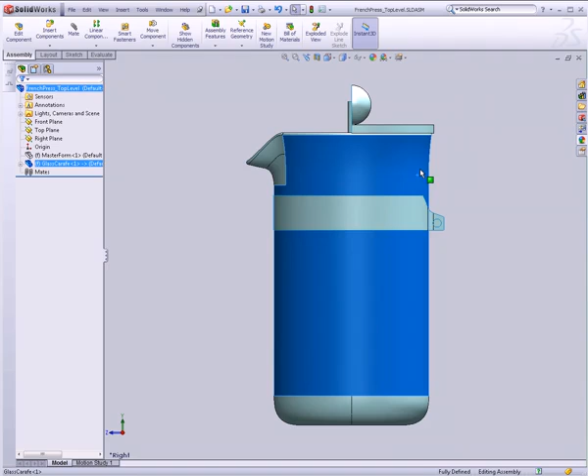Now at this point you might well be wondering why we didn't put the handle, which is such a big important detail, into the master model. Well, as it turns out, we didn't need to, because all we need for the handle is this surface here and maybe this screw hole there.

So why don't we go ahead and add the handle next. First of all, I've got a bunch of surfaces showing in my glass carafe now that I would like to hide. When we imported that master form, it brings in all of the surfaces, and since we added a whole bunch of new surfaces, they're showing up in our part. So to hide them, I'm going to expand my part within the context of my assembly, go down and just hide all of the surface bodies, because we don't have to look at them.

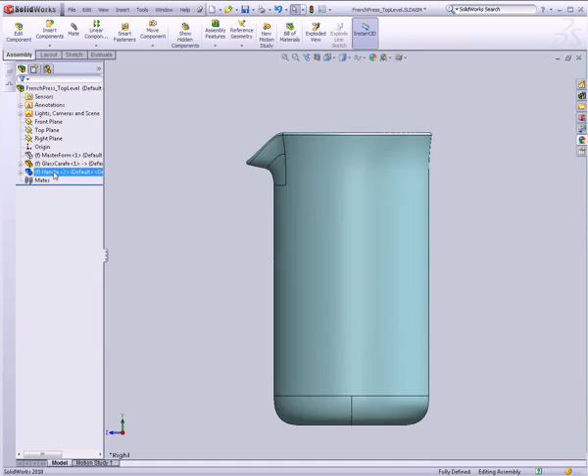Now let's go and add our handle. I'm going to go Insert Component, insert a new part, just like we did before, click in the viewport, rename it to Handle, right-click, Save Part in External File, click OK, and now I can open that. Now we're in a blank part, Insert Part, and we should have three parts in here, our master form, our handle, and our glass carafe. We'll do our master form and click OK.

We need surface bodies, and this time I also want to bring planes. We are going to need our planes this time. And now it's going to bring in everything. We got in all of our surfaces and all of our planes to work with.

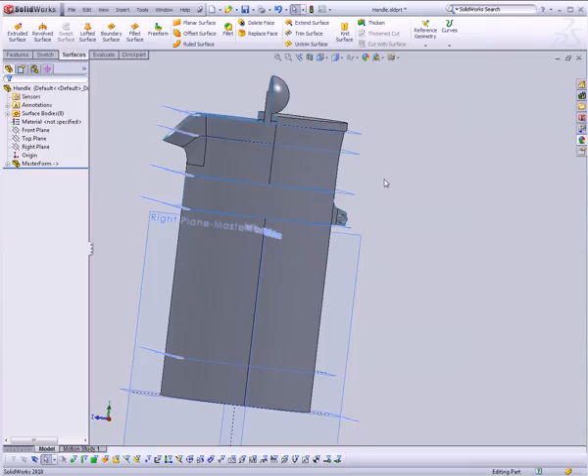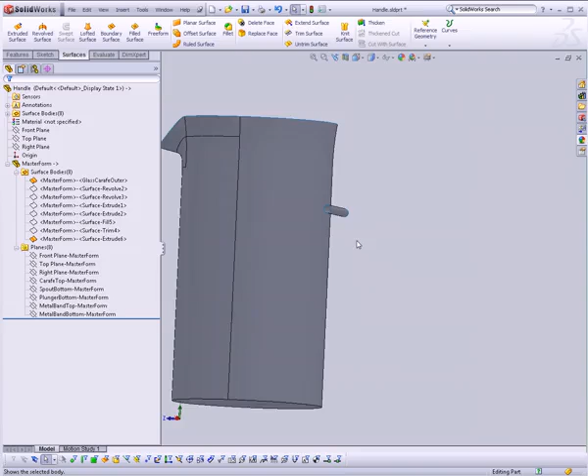Great, so just to be tidy, let's go ahead and hide most of this stuff. I'll hide all the planes so we don't have to look at them. All I need is the carafe, I think, and the screw hole. That'll be helpful. And maybe we'll just show the metal band too. Why not?

Okay, let's create a couple of planes. First of all, we need a plane that will define the width of our handle. So I'll take the right plane, hold the Control key, drag it over to duplicate it, and I just want to come over 0.5 inches. And it turns out we are still working in millimeters right now, so let's go ahead and make that change.

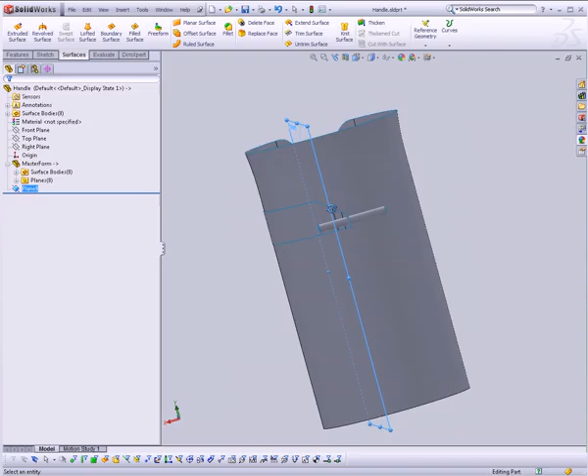Let's go Tools, Options, Document Properties, Units, Inches. And again, if you work in inches all the time, then you can set the default to be inches, but in this case, I work in millimeters most of the time. I'll call this handle width.

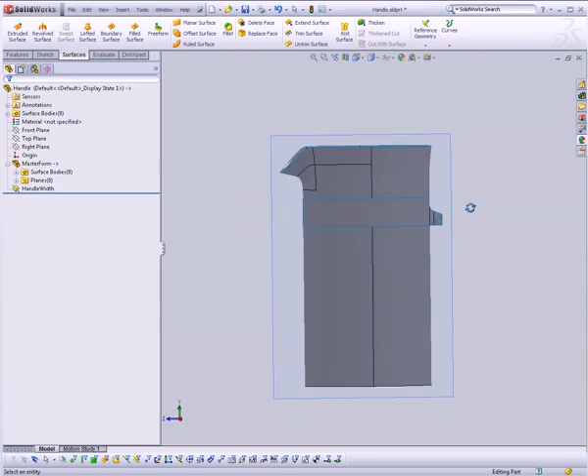And I need one other plane. That is going to be the back side of the handle. So let's take the front plane, hold the Control key, duplicate that back by 1 3/4 inches - oops, 1.75. And we'll call this our handle base plane.

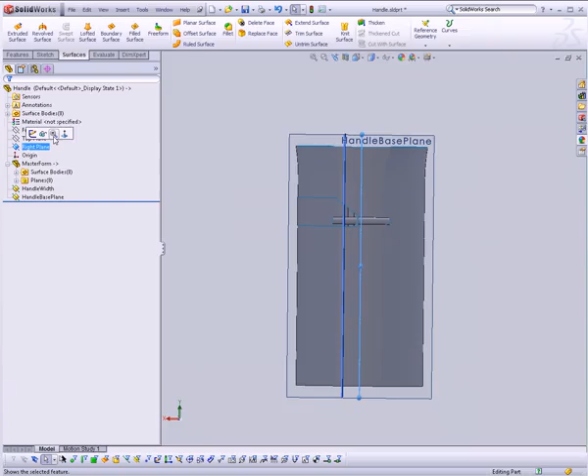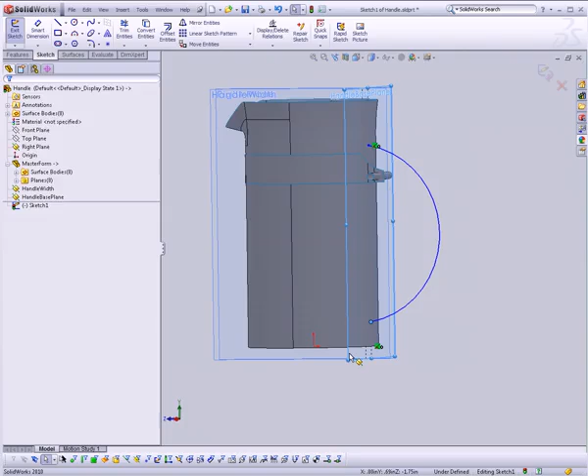So let's go ahead and show the right plane as well and start to work. First we're going to need a sketch with an arc on the right plane, something like so. I'm going to tack these end points down to the handle base plane by making them coincident. And I'll also grab the center point of my arc, make that coincident. So now we are just sitting right on that base plane.

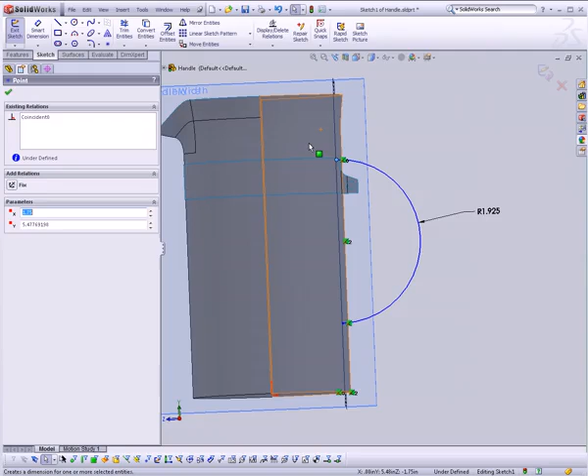I'll set the radius of this to be 3.85 divided by 2. That should be about right. And let's make the top of it coincident with the top of the metal band. So we'll just drill down into our master form document, choose the metal top band, and make it coincident. So this is where our handle is going to exist.

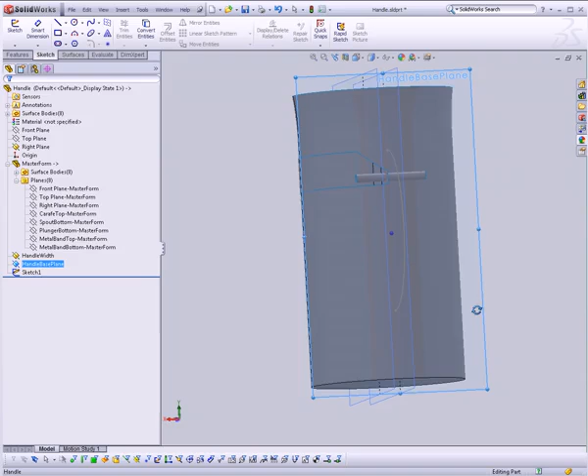Click OK. Now we just need to draw a couple of cross sections. My handle is arched at the top and flat at the bottom. The bottom one will be easy enough, so we can go ahead and do that.

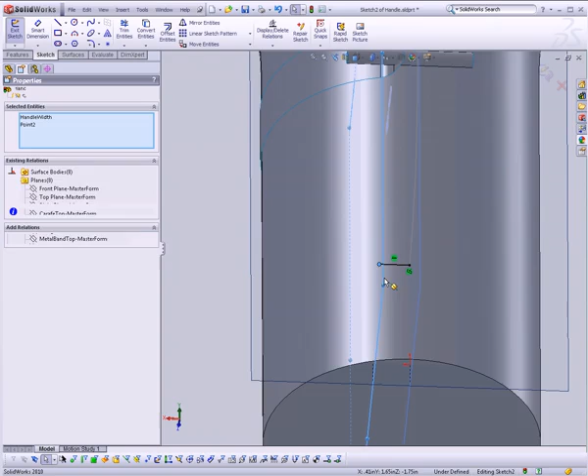And let's see, let's do this. Make one side of this - there we go. Make that a pierce relationship, and make the other side coincident with the handle width plane. That ought to do it. Oops.

By the way, I just accidentally lost my model. It was way off in space somewhere, and I didn't know where it was. It was a blank screen. So to fix that, I hit the F key on the keyboard for fit, and that will put everything back where it ought to be.

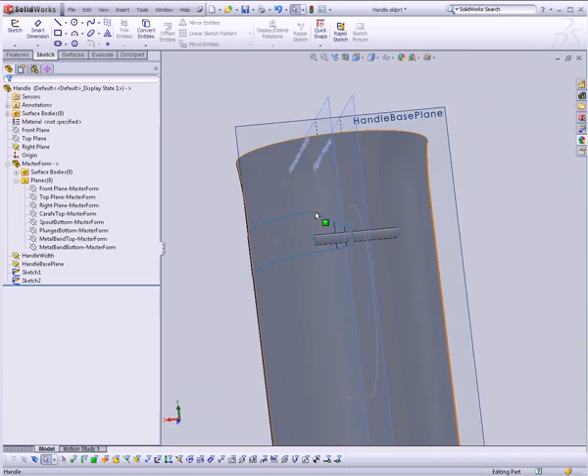So let's go back to our base plane and sketch an arc this time. I want something like so. I'm going to take that point and this sketch and put that pierce relationship on them again.

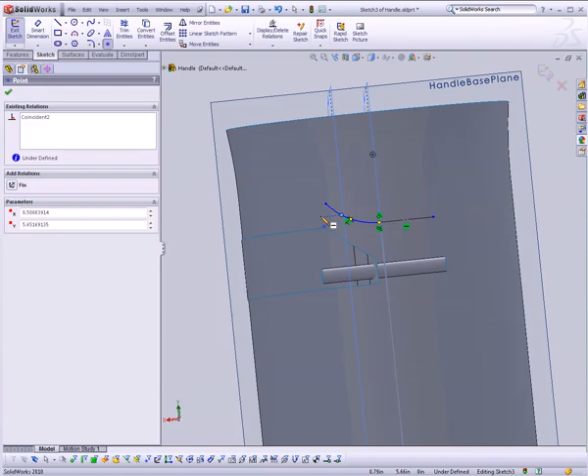And I'm also going to add an extra line in here. It's going to be a horizontal line. I'm going to make it a construction line and then define it to be tangent with the arc. I'm also going to put a point along this arc and do the exact same trick that we used when creating the line to chop the metal band.

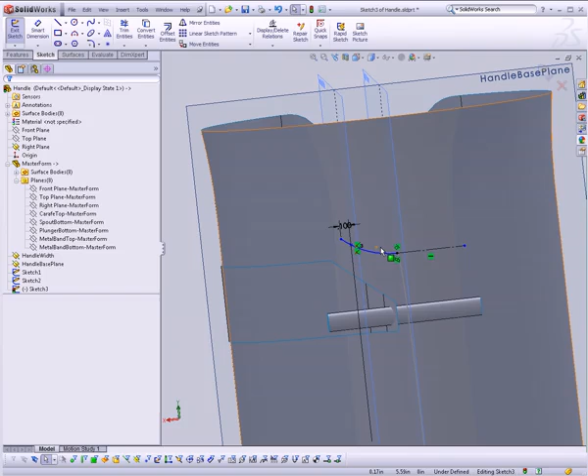I'm going to make that coincident with the outer plane so that I can extend this arc out beyond that plane a little bit. And I'm just going to define this point to be maybe 0.1 inches beyond that plane. So now we have almost fully defined.

One more thing, need to define the arc height of this, and let's say that it is 0.135 inches. There we go. Now, I didn't make the bottom line extend beyond the outer plane, so let's fix that. I'm just going to drag it out beyond, make it go beyond by 1/10 of an inch.

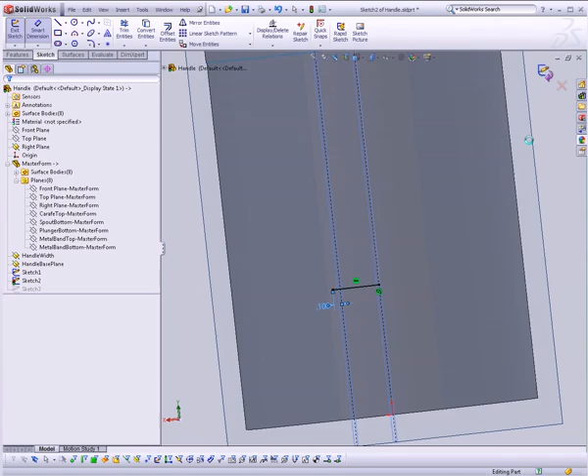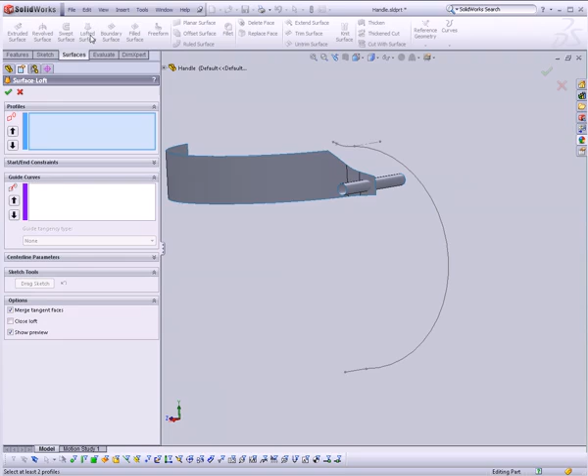Perfect. So now we can go ahead and create our base surface. I'm going to hide these planes so we don't have to look at them anymore, and why don't I go ahead and hide the glass carafe as well. So let's go to our surface tools, and this time I'm going to choose lofted surface. I'm going to create a loft from here to here, and then as a guide curve use this center curve. So there we have it. We have a nice arced top and a flat bottom.